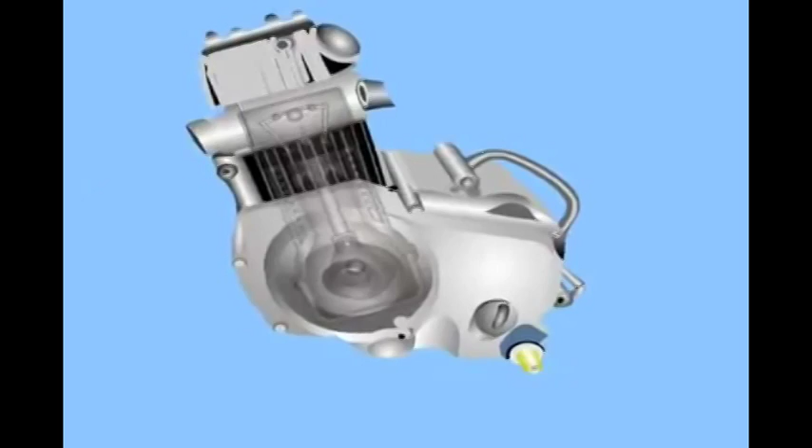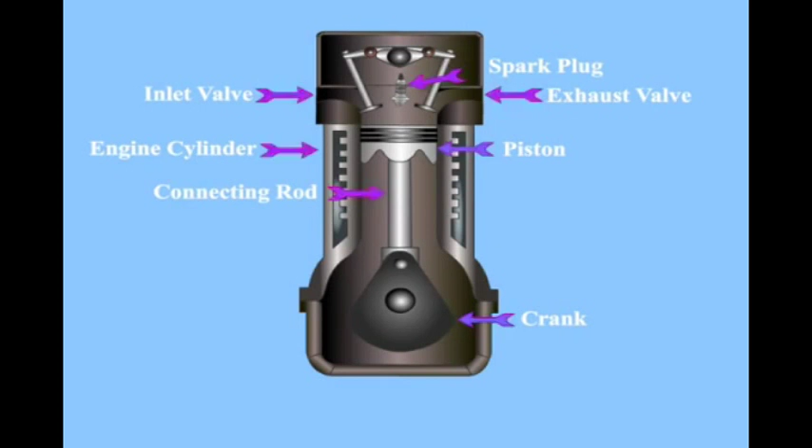Hello friends, everyone knows what a motorbike is. But how many of you know the working principle of a motorbike and its engine? Well, in this presentation, we will give you a brief explanation of the working principle of a 4-stroke petrol engine, which is also known as IC engine, that is, internal combustion engine.

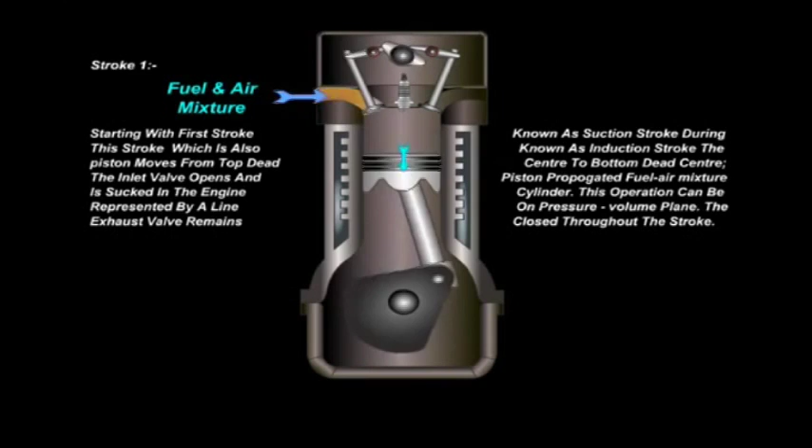The first stroke is known as suction stroke. During this stroke, also known as induction stroke, the piston moves from top dead center to bottom dead center. The inlet valve opens and the fuel-air mixture is sucked into the engine cylinder. This operation is represented by a line on the pressure volume plane. The exhaust valve remains closed throughout this stroke.

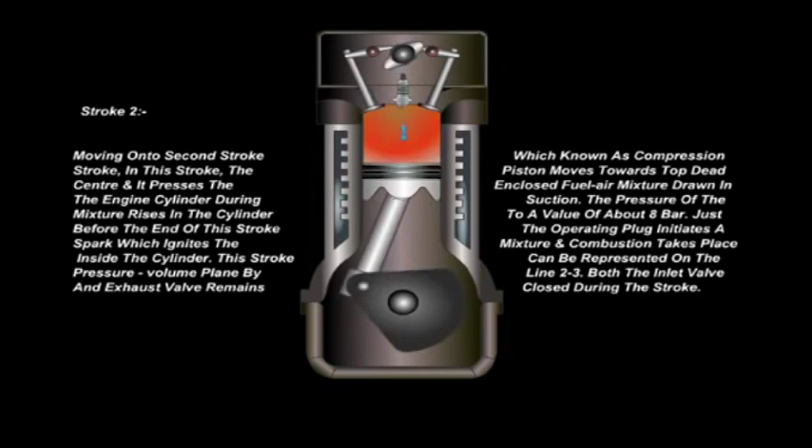Moving on to the second stroke, which is known as compression stroke. In this stroke, the piston moves towards top dead center and it presses the enclosed fuel-air mixture drawn into the engine cylinder during suction. The pressure of the mixture rises in the cylinder to a value of about 8 bar.

Just before the end of this stroke, the spark plug initiates a spark, which ignites the mixture and combustion takes place inside the cylinder. This stroke can be represented on a pressure volume plane by line 2-3. Both the inlet valve and exhaust valve remain closed during the stroke.

Now let's see the third stroke, known as working stroke. When the mixture is ignited by the spark plug, the gases are produced which drive or throw the piston from top dead center to bottom dead center, and thus the work is obtained in this stroke. It is during this stroke when we get work from the engine, the other strokes, namely suction, compression and exhaust, being idle.

The flywheel mounted on the shaft stores energy during this stroke and supplies it during the idle strokes. The expansion stroke is shown in the pressure volume diagram by line 3-4. Both the valves remain closed during the start of the stroke, but when the piston just reaches the bottom dead center, the exhaust valve opens.

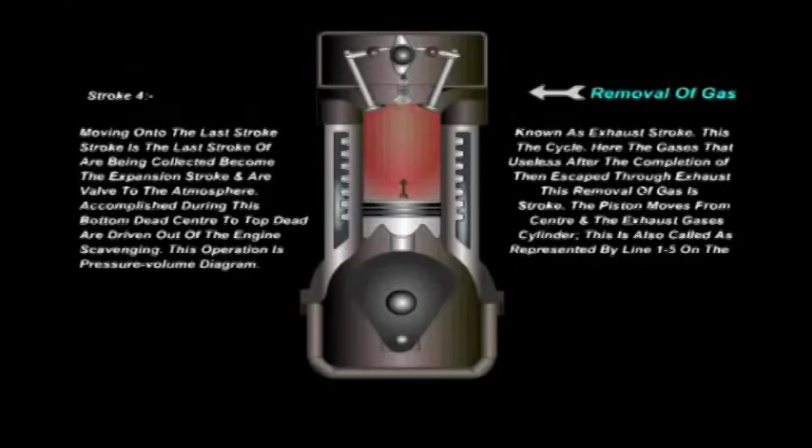Moving on to the last stroke, known as exhaust stroke. This stroke is the last stroke of the cycle. Here, the gases that have been collected become useless after the completion of the expansion stroke and are then escaped through the exhaust valve to the atmosphere. This removal of gas is accomplished during this stroke.

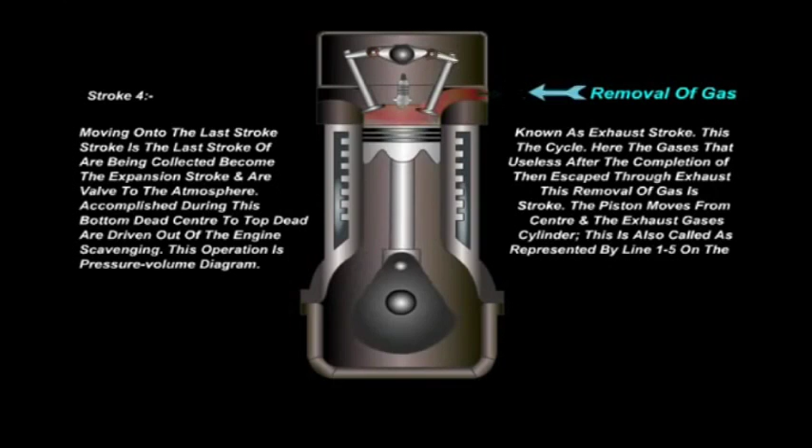The piston moves from bottom dead center to top dead center and the exhaust gases are driven out of the engine cylinder. This is also called scavenging. This operation is represented by a line 1-5 on the pressure volume diagram.

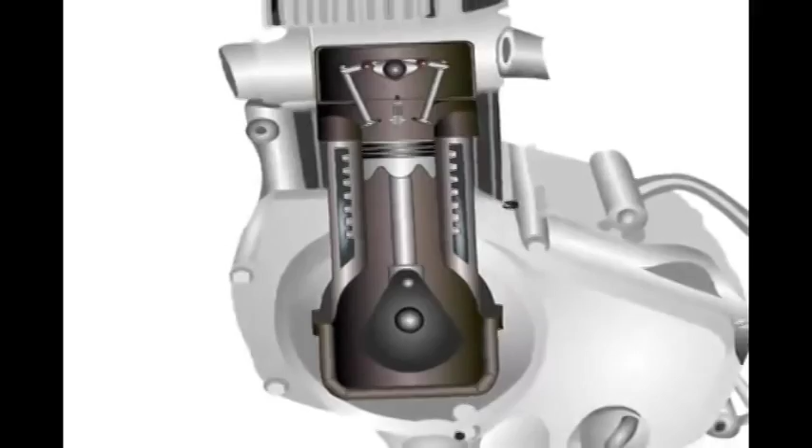With this, we come to the end of our presentation. We hope that you all have understood the working of the 4-stroke engine.